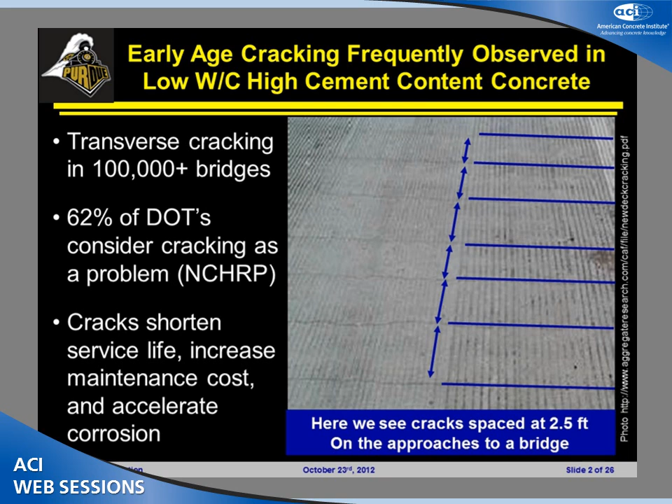So the question is, can we do something early on to get substantially more service life out of the decks we're looking at? What I want to try to go over today is 4 main points.

I want to understand a little bit about why low water to cement ratio, higher cement content mixtures may be more susceptible to cracking. These are the high performance concretes we're talking about. We want to understand why they're more susceptible to cracking, and we want to understand how this can be combined with internal curing to reduce this cracking potential, especially at the very early ages.

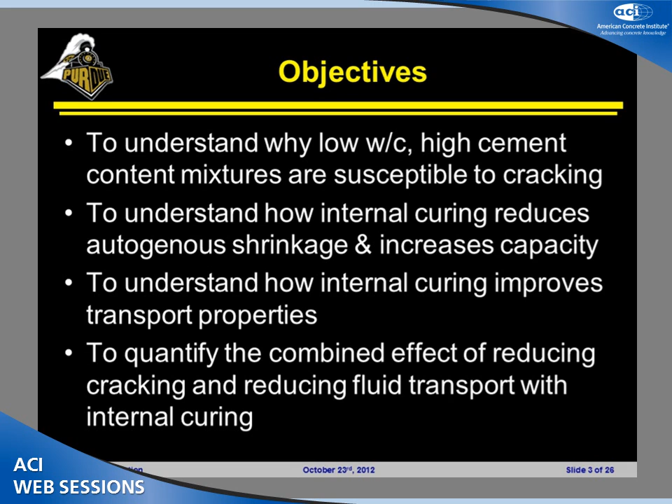This is a technology that's really going to help out during the really early time where the concrete is very susceptible. I'm going to skip through this part quickly, but I want you to understand how internal curing helps us with the transport properties as well. Then what we're really looking at is combining both of these issues together. Can we reduce the cracking, but also reduce the transport properties, and what are the impacts on service life? That's really where I think we start to see the benefits.

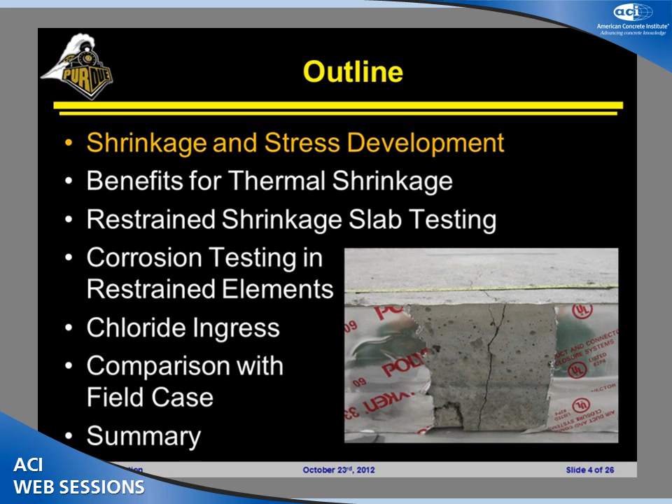So what I want to do very quickly is talk about shrinkage and stress development, for the idea of trying to motivate why lower water to cement ratio, high cement concretes may be more prone to early age shrinkage cracking. In order to do that, I think it's important that we take a look at some of the main factors that drive the shrinkage and the stress development in the system.

Now, I'm not expecting everybody to understand all the equations and variables and to rederive this at the end, but the basic idea is we've got a sample that's a specific length. If it wasn't restrained, it would shrink, it would get smaller by a certain amount. The subgrade, if it's a pavement, the bridge deck, the girders, if we're in a bridge system, they're going to restrain it, and it's effectively like pulling on the concrete in tension. If we just do this, this green line here is nothing more than Hooke's law: stress, modulus, and the shrinkage.

However, there's an additional effect that comes into this, which is really, really beneficial at early ages, and this is viscoelasticity. This is relaxation, stresses being worked out of the system at very early ages. So you can see that the stresses are substantially reduced by this viscoelasticity.

I think this is a really important point to bring out here, because in this particular case, viscoelasticity is helpful to the system. Creep, for example, relaxation is a good thing because it helps reduce the stresses in the system. So by the time we formulate this equation, we've got shrinkage involved, we've got modulus involved, and we've also got creep involved in the system.

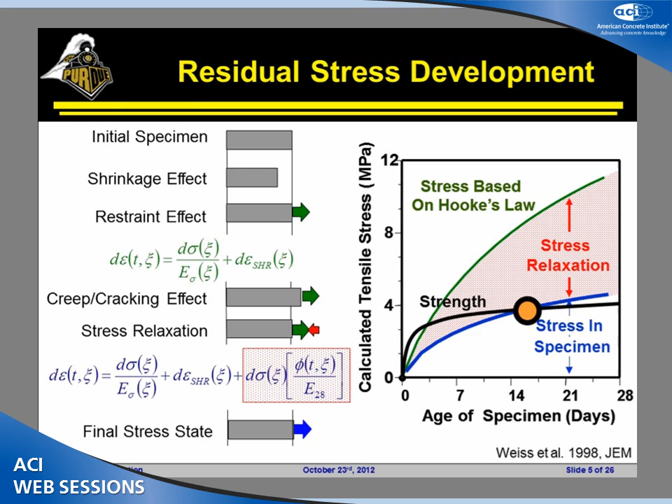In addition, the higher performance concretes tend to be more brittle. But you may say, well, I'm going to make it up because I'm going to have lower shrinkage in the overall system. So you can go to a textbook and say, well, if I look at the shrinkage, it decreases as a function of water to cement ratio.

But what I'll point out is when we look at restrained shrinkage cracking data, we have the age of cracking plotted against the 28-day strength. The higher the strength, typically the more susceptible the concrete is to cracking. Now you may say, why is this, if we're decreasing the shrinkage?

One thing that's very important when we go back and pull some of this data out of older literature: this is done with the ASTM C157 test, the free shrinkage test that starts at 24 hours.

And what I really want to drive home here, when we're talking about high-performance concretes, is that just because you took 24 hours between placing the concrete in the forms and coming back to start the measurement, doesn't mean the concrete also took that time off.

So if you measure the autogenous shrinkage occurring during that time, you can see this is the amount of shrinkage that's being missed out on while the concrete is in those forms. And what I want to argue is that this autogenous shrinkage is occurring uniformly throughout the cross-section. It's also the autogenous shrinkage we're not accounting for if we just have a spray-on film, because it's not due to evaporation—it's due to chemical shrinkage and self-desiccation.

And the other thing I want to point out is if you add this 250 in here, this line becomes really flat. We see that shrinkage is really not as related to water to cement ratio as this graph would lead us to believe, but it's more related to paste content and water content. As a lot of people go to get these higher strengths, they increase the paste content, which means they're going to increase the shrinkage in the overall system.

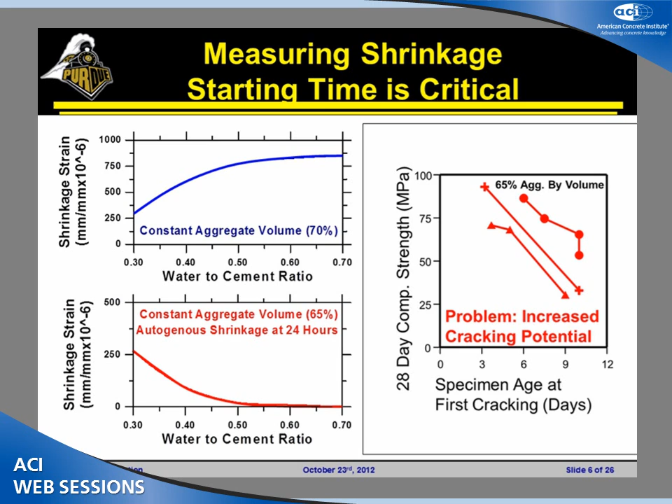So the big thing I want to drive home: is high-performance concrete something we shouldn't be striving for? No. But what we need to understand is, as we go to higher strength concretes, modulus goes up, which is not necessarily a good thing. Creep goes down, which is not necessarily a good thing. The shrinkage doesn't necessarily decrease like we think it may, and the material becomes more brittle. So we have a system that starts to become more susceptible to potential early age cracking.

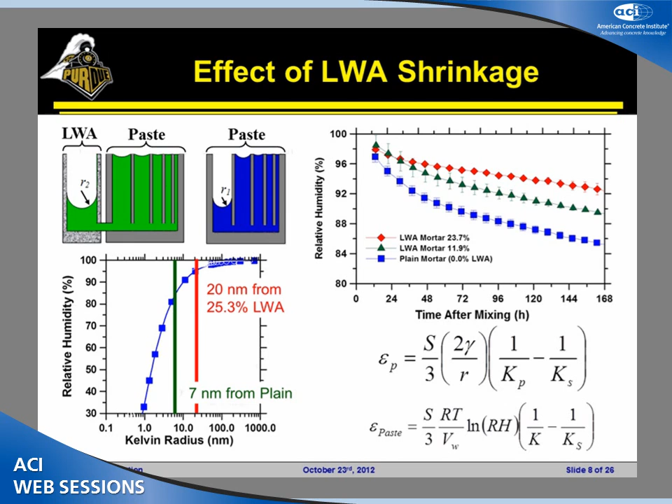We're keeping the pores inside of the paste full. By keeping the pores inside of the paste full, we're not getting capillary stresses developed. Those capillary stresses are really what's responsible for the macroscopic shrinkage that we see. So we could say that the shrinkage of the paste is related to how wet the concrete is, the degree of saturation, but it's also related to the size of the pores that are empty. If we keep all the pores full, we keep the bigger pores full, we can substantially reduce the shrinkage, which is what we're seeing on this plot back here.

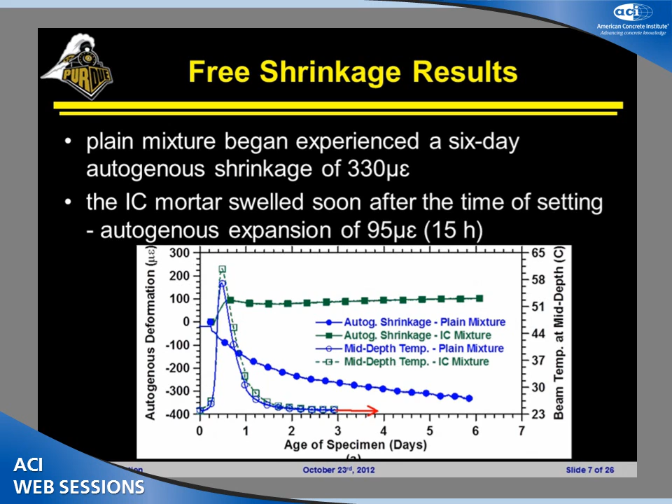In the internally cured concrete, we're seeing a slight expansion due to swelling at early ages, and then really no shrinkage during that first week that the concrete's being placed.

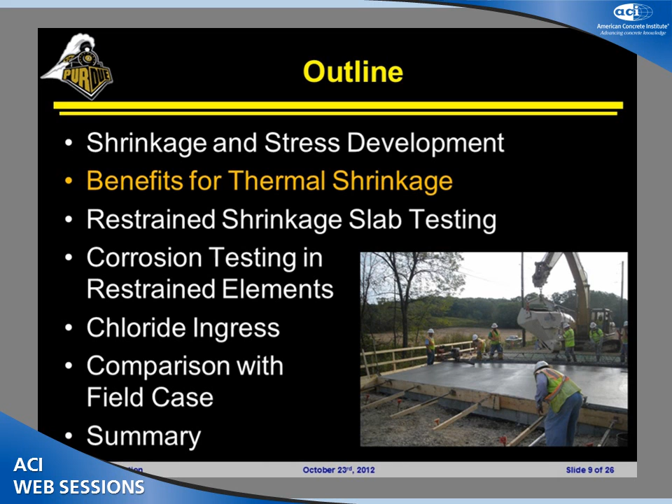Now, what are some of the benefits of this when we start to look at other properties of these decks? Well, one of the things I want to talk about briefly is the way that this also contributes to some of the thermal effects that we may be seeing.

So in addition to using the rings just to monitor drying shrinkage or autogenous shrinkage, what we're actually going to do is use a test where we restrain the concrete, and then also try to send the concrete through different temperature cycles.

And what we're really looking at here is a twofold issue. One, if we drop the temperature, we can see how much residual stress capacity there is in the system, how much we have to drop the temperature to make it crack.

If you're thinking about this in a really practical sense, this is the question we're trying to answer a lot of times in 2 or 3 days. We start to remove formwork, we start to remove some of the curing blankets, we start to do those things. What happens now? How much of a temperature drop can we sustain before we would get cracking in those particular elements?

Now, this looks like a ring test here, as we've talked about with ASTM C1581. There are 2 main differences with this test. One, you will notice that this particular test has 2 rings. It's got an inside ring and an outside ring.

The inside ring is for shrinkage. The outside ring is for expansion. And as we mentioned before, you can get a little bit of swelling in these mixtures, and that's one of the things we want to try to capture.

The other thing I want to point out is these rings are not made out of steel. These rings are made out of a special kind of steel called Invar, which doesn't change dimension very substantially as the temperature drops. So the restraint is staying constant, and we're dropping the temperature, so the concrete will be what's wanting to move during that particular test.

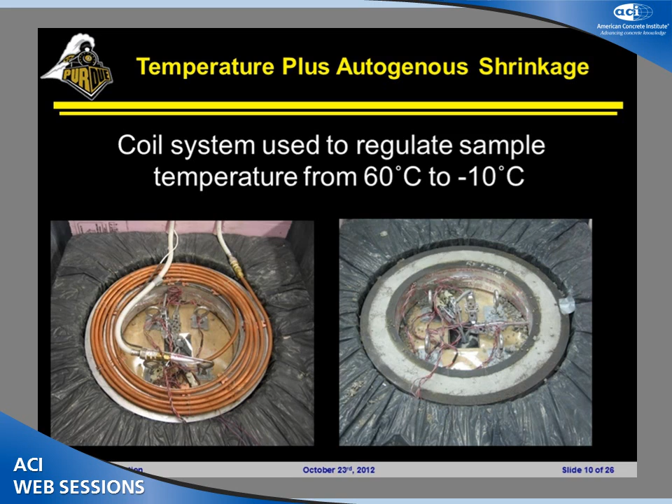So a typical result that we may see for some of these concretes, we'll be comparing a plain and an internally cured system. The basic idea is the plain system: we cast it, the stresses build up slowly over time. At 3 days, we can see they rise quickly, and the reason they're rising quickly is because we're dropping the temperature right around the 3 days.

What's interesting about this plot is we drop the temperature 10 degrees Celsius, roughly 20 degrees Fahrenheit, and the system cracked. If we do exactly the same thing with the internally cured mortar, we see that we're getting some stress buildup, but not nearly what we saw in the plain system.

Now we drop the temperature right around 3 days. What we see is a substantially higher amount of stress can be tolerated in the system. Instead of having a 10 degrees Celsius or 20 degree Fahrenheit temperature drop, we now have a 27 degree temperature drop that's required to cause cracking. So all of a sudden we've got a system that's a lot more robust to cracking at these early ages.

One of the real reasons this is very important is because we have big temperature differences taking place in samples, because of the fact that we're losing heat to the atmosphere, but also we have heat of hydration buildup in the samples as well. So building in a little extra capacity really can help us out substantially. The other thing I'll point out is the stress development rates in both of these systems are not the same.

This is partially due to the fact that you've got a system that's more saturated, and partially due to the fact that you've got a system with a slightly lower elastic modulus, because we've got the lightweight aggregate system. So now we can actually be reducing the rate of stress development, because the coefficient of thermal expansion drops with increasing degree of saturation, and because we've got a slightly more compliant system.

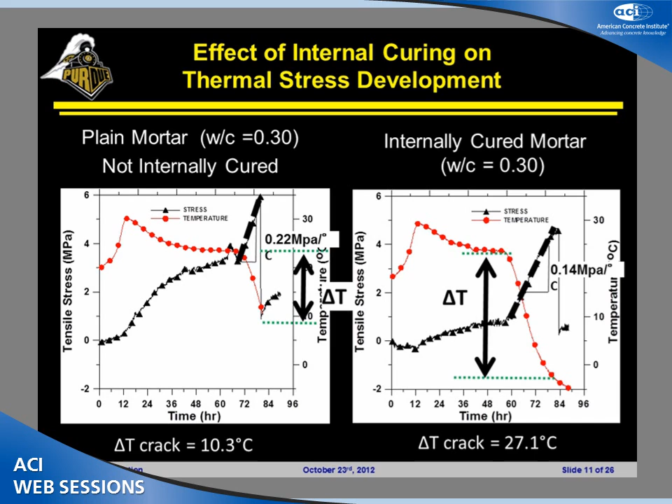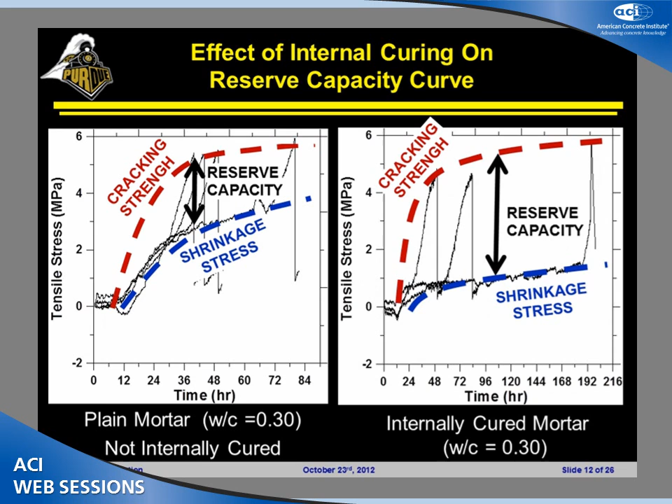We can go through and do this type of testing at different ages, and really trace out some envelopes that give us the overall reserve capacity in those systems, so we can see how much additional loading or temperature swing we may be able to tolerate.

Now what I want to do here is take what I think is the next step forward, where we're really trying to bring two things together. We're trying to simultaneously look at shrinkage and corrosion effects at the same time.

The idea here is we know that internal curing is effective at reducing shrinkage. We talked earlier that it's effective in reducing transport properties, and we'll see this later this afternoon—there'll be several talks that start to talk about this.

What we want to do is use a full-scale slab geometry instrumented with an instrumented rebar to start to look at how corrosion is taking place in these two systems. The results are aimed at understanding a little better how internal curing is really going to alter service life, because neither one of these components on its own fully captures the behavior.

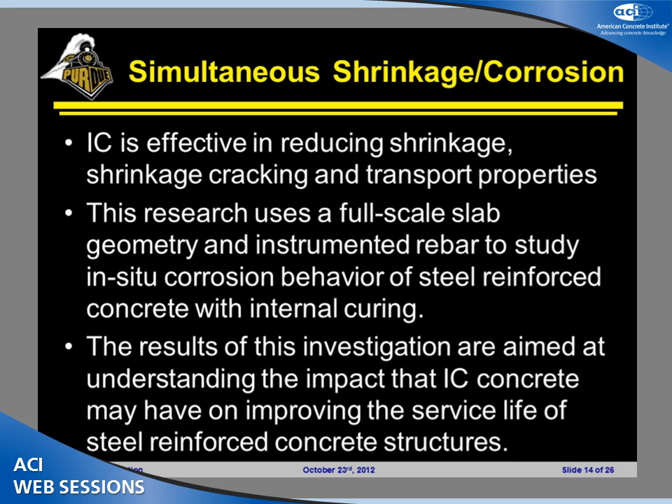So the idea is we're going to place a plain system and an internally cured system, and those are the two systems I'm going to be talking about today. They're on a restrained element, roughly 14 feet long, 5 meters long. It's a fairly substantial beam underneath here—I'll give you the dimensions in a second—but it's a very, very stiff element.

So we've got a high degree of restraint in the system, and we're going to place an instrumented rebar right down the center here, so that we can actually start to monitor a few things about corrosion.

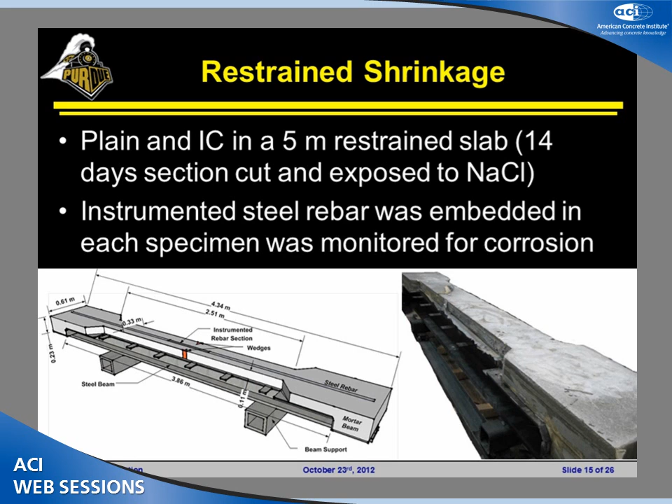As I mentioned, here are some of the details. It's a heavily instrumented W12 by 210 beam, so this is a very, very stiff beam. It's widened at the ends and deepened at the ends to make sure we have sufficient restraint. We bolt and tie down the ends of this.

In this particular case, since we're using the instrumented bar, we put slight wedges in the center, because we want to be able to control where the crack is going to form if it does form. One of the things we're really looking at is not only the width of the crack that forms, but we think that equally important is how much debonding we get along the length of the bar.

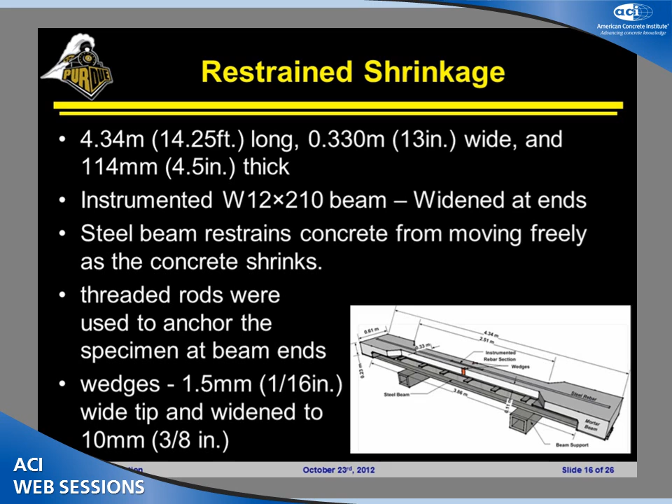Because if we get debonding along the length of the bar, chloride ions can move very quickly along the length of the bar and start to corrode a substantial length of that bar that's taking place in the system.

So, as I mentioned before, it's an instrumented rebar. What this means is we've taken a number 6 grade 60 rebar, essentially put that into the center section, and threaded the ends. This 15-inch section of the rebar has actually been hollowed out, so we've drilled out the center portion of that rebar.

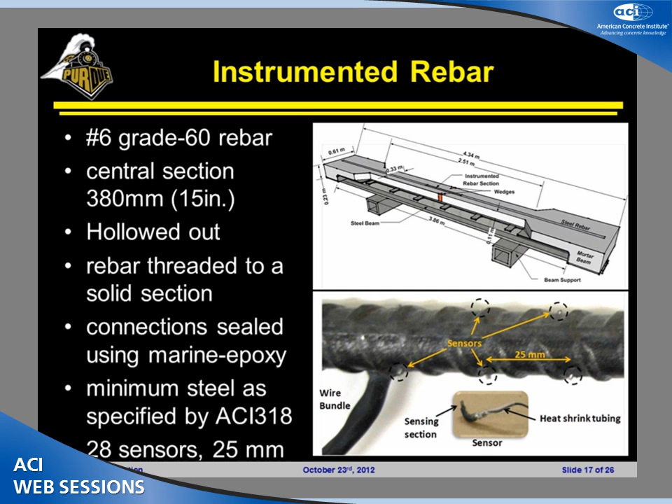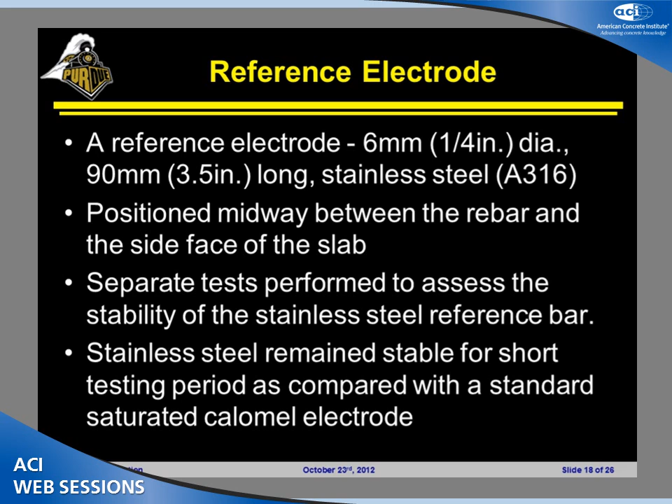We're going to be doing corrosion monitoring here, so we're going to be using a reference electrode. We're using a stainless steel reference electrode that for the duration of this test has remained relatively stable.

We're going to talk more about some of the results. One thing I really want to point out is the green line versus the blue line. The green is the internally cured mix, the blue is the plain mix. The internally cured mix is under slight compression because of that expansion and swelling. The other mix is undergoing tension.

The green mix shows a little bit of swelling due to swelling plus temperature, but the stresses remain slightly in compression throughout the entire test. Right after about 2 weeks, we started to dry these elements out.

The blue one, though, you can see there are several jumps in the data. You might think something funny is happening in the data - well, those jumps are something funny that's happening. Those jumps are cracks. What's interesting is the gauge section is about 8 feet long, and we picked up at least 3 cracks that formed in that section, so about every 3 feet we're getting cracking in the system.

What's interesting is we set this up so we can actually monitor the cracks we're developing, monitoring the width of the cracks. Here you see the first crack developing. As the second crack starts to form, the crack gets a little narrower and then starts to pick up again as the next crack forms. We can see this repeated pattern.

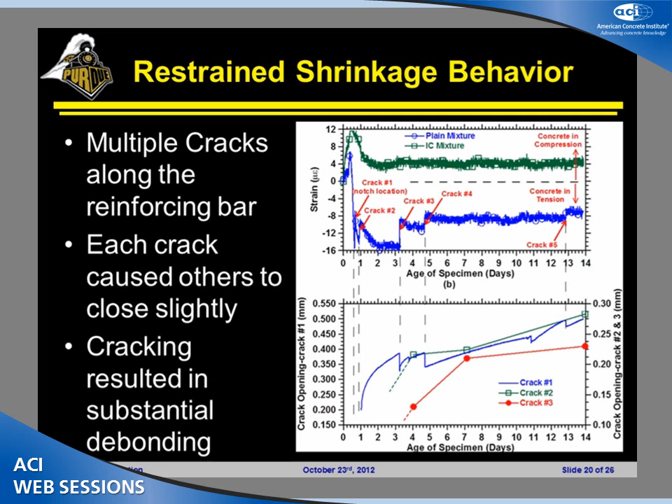The second and third cracks we're not monitoring with continual monitoring, just monitoring the widths that are forming, so we get a fairly stable size of the cracks forming in the system. The other thing I want to point out is that this gives us crack width, but it doesn't tell us how much of the bar is debonding when that crack forms, or how much of an opening is happening in that system.

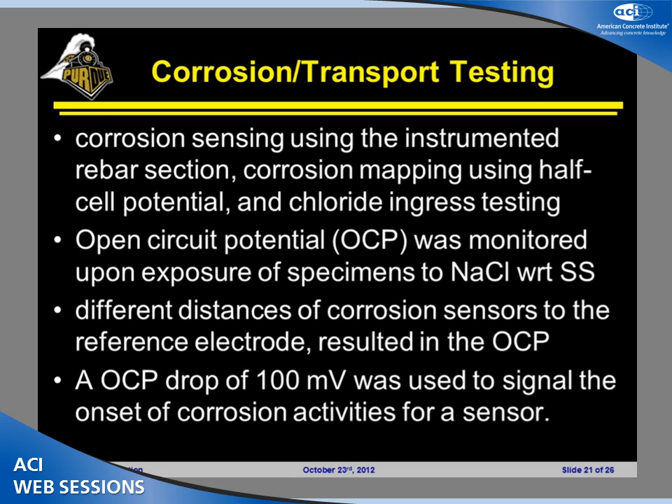As mentioned, we're going to be monitoring corrosion in the system using the sensors, using half-cell potential, and then doing additional chloride testing.

As I mentioned before, after this two-week period we went in and ponded over the center portion of the specimen. This pond was slightly larger, but the basic idea was supplying this de-icing salt. What was really interesting is that the internally cured concretes, 2.5 to 3 years later, are still not undergoing corrosion. The main reason is we've got a fairly decent cover thickness on them.

The chlorides are working their way down to the bar, but there's no cracking in that system. The plain system, however, has that crack, and we can see the sensors start to go into corrosion almost instantly. What's really intriguing, and backs up some of our other work, is that it's not just corrosion taking place at the crack - we've got corrosion taking place substantial distances away from the crack surface, mainly because we're getting debonding in those areas as the crack forms.

So the crack doesn't just go down to the bar and stop. The crack goes down to the bar, and we start to get debonding along the length of the bar, and that becomes a fairly substantial component of this.

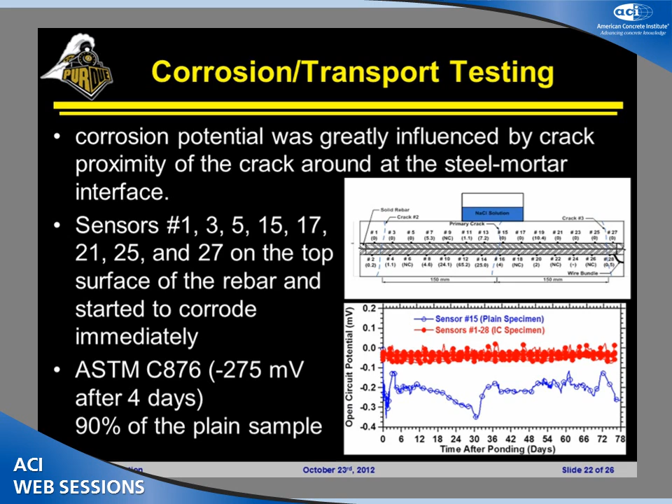Now, to bring this back and tie it into some of the field things we mentioned before, we're really trying to understand the interrelation between restrained shrinkage, the stresses that develop in cracking, as well as corrosion.

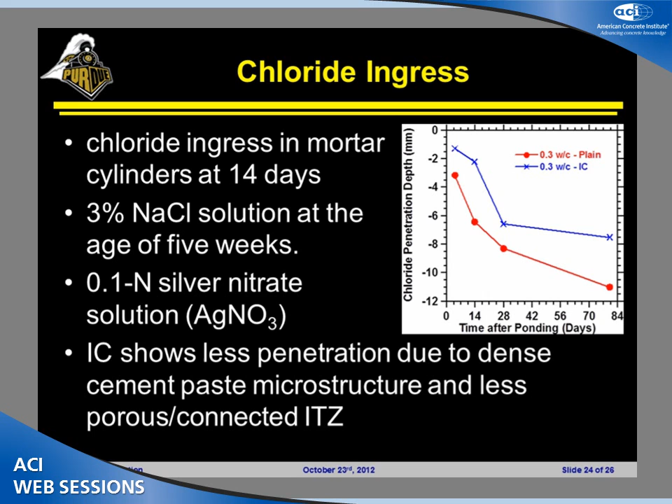Here's a little information on the chloride ingress, basically looking at penetration depth. This afternoon there will be several talks that get into transport properties in a lot more detail. One thing we're seeing is that because of increased hydration and disconnection of the interfacial transition zone, we're getting lower chloride transport in the systems that are internally cured. This gives us a bit of that information for this particular system.

Now, how does this start to relate to some of the things we're seeing in practice? Here is an example of two bridges that have been cast. These bridges were cast at the same time, with a day separating the two - same contractor, same raw materials, same construction crew placing them. But we have a plain bridge deck and an internally cured deck.

Now, the strength of the plain system was again about 10 to 15% higher. The transport properties of the internally cured system are slightly lower, about 10% lower. But what's really the evidence driving us to the idea that this has the potential to change service life...

...is what we observe going back to this bridge deck as we keep going throughout time. The plain deck has 3 cracks that formed, and the cracks are substantial width. The internally cured deck has no cracking. Now, does this mean you should expect no cracking on every internally cured bridge deck? I would say no, that's pretty unrealistic. But what we can definitely see is there's a substantial reduction in the number of cracks forming in those particular cases. Same crew, same plant, same location.

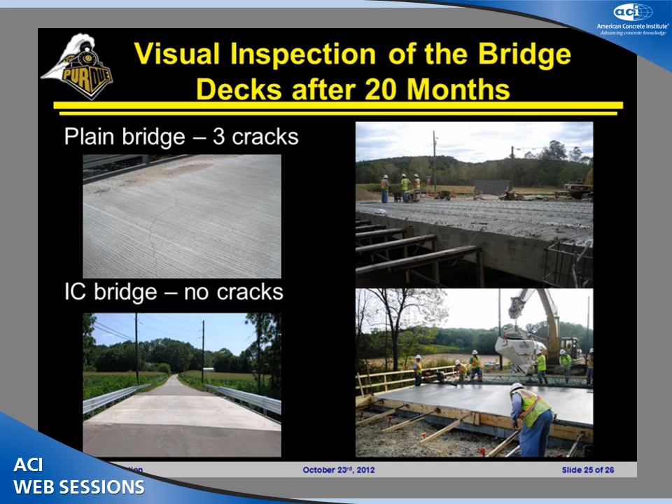The only thing we did was replace about 25% of the sand with lightweight aggregate. So in conclusion, the whole thing has really been focused on the idea that lower water-to-cement ratio, high paste mixtures can be more susceptible to cracking. This is due to autogenous, drying, and thermal shrinkage.

By using internal curing, it allows us to reduce the autogenous shrinkage. By reducing the autogenous shrinkage, we increase the stress capacity in the system, which means we have a little bit more robustness when it comes to thermal cracking and loading, and it may allow us to make it through that first 2 to 3 week period a little bit better.

Internal curing reduces the transport. We've begun a program looking at these large-scale slabs to simultaneously investigate cracking and transport to bring those two things together. The instrumented rebar has helped us because it's determined not only the age at which corrosion begins, but also things like the distribution along the interface, which can be substantially further back from the crack than originally thought.

The plain mix cracked at several locations and went into corrosion very quickly. The internally cured mix didn't crack and is still being monitored for corrosion. So with that, I'll turn it back over to Anton.